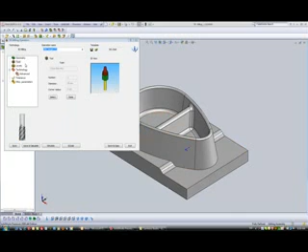I'll be using a 20 millimeter rough end mill to use on the rough cut. If I go to my technology area, we'll be doing a rough cut using a contour option in the rough cut itself. If there are any flats, which there are on this part, I'll be cleaning those flats after I finish my rough cuts, and I'll be leaving a surface offset of 1 millimeter.

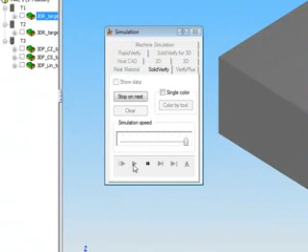Let's just take a quick look at our simulation itself using the Solid Verify simulation, and you'll note that the tool is working on every single one of those areas, doing a rough cut, stepping down the exact amount that it should be stepping down, cleaning the outside and the inside as well until it finishes the part, doing as much as it can do with this type of tool.

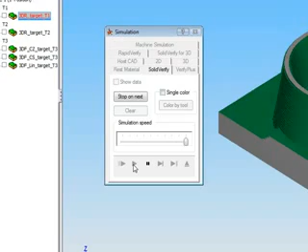Now, in my next operation, I'll be doing a rough cut again, but this time taking smaller steps to make it more feasible for a finished cut, but only working those areas that need to be cut.

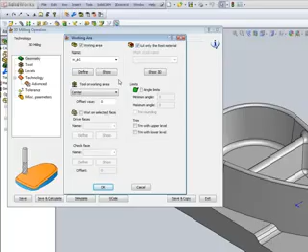So if I open up this operation we've done here, and go into my working area, I'll be using the same working area as last time, but I'll also add in one more note: cut only the rest material. This will allow the tool to work only in those areas that need to be cut, with rest material to be taken off. In my technology area, again I'll be using my rough cut and stepping down every 2 millimeters.

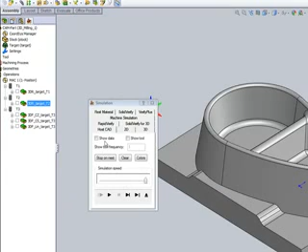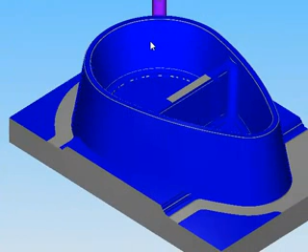Let's take a look at our simulation again using the Solid Verify simulation, and you'll note that the tool itself will only work in those areas with rest material to be taken off. It will not work on the outside of this area or in this blank area, just on the floor over there, on these walls, and on that floor over there.

Now it's more feasible to start doing the finish cut. In our next 3 operations, we'll be doing our finish cut.

In our first operation for our finish cut, we'll be doing what we call a constant Z, working only on the steep walls as shown in this area over here.

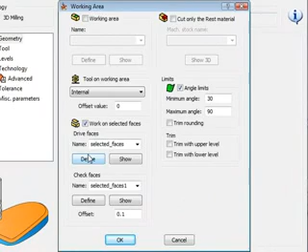So what we've done over here is we've gone into our working area and chosen the option of working on selected faces. If I were to show you those faces, you can see we've actually taken every single one of these faces, including these flatter areas over there.

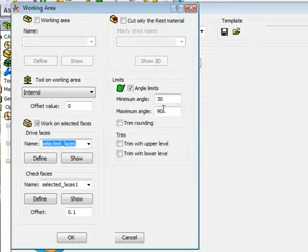However, we've also added a limit. The limit is to work only in the areas where the wall is steeper than 30 degrees, anywhere between 30 and 90 degrees, because we know that constant Z works best on steeper areas, so therefore it will not work on these areas over here, and also will not work on those radiuses as well.

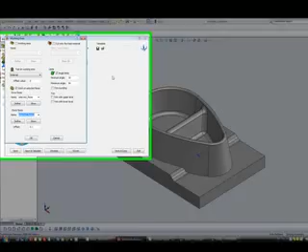Now, in our check faces, we actually have the floors themselves from the outside, and we're just going to make sure that we stay away from those floors by 0.1 millimeters as an offset to make sure we do not touch those floors itself.

Now, in our technology area, we'll be using the constant Z, going down with a scallop of 0.03 as a step down.

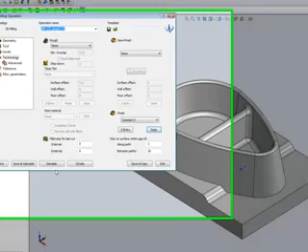And if we take a look at our simulation, you'll see that the tool will work only on the wall itself, as you can see with this toolpath over here, and will not work on this area, and will also not work on this area here as well.

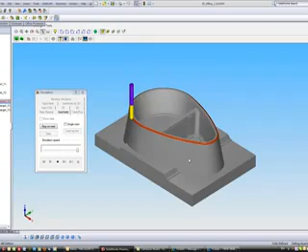If we take a look at our Solid Verify simulation again, you'll see the tool is working only on these areas as shown over here, and will also only work on this area over here.

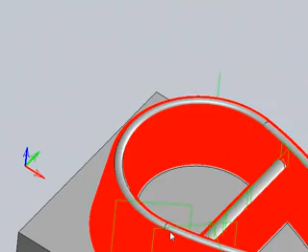And as we can also see here with our toolpath generator, you can see that the toolpath is only on these walls over here, inside walls, not on this top area, and not on this flat area inside here as well.

Now, in our next operation, we'll be using the same working area, but this time we'll be limiting it between 0 and 32 degrees. In other words, now I do want it to work on these floors and on these radiuses.

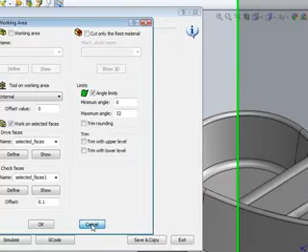The option that I will be using in my technology will be constant step over using pocket auto boundaries. In other words, the boundaries will automatically be taken from our working area, which is limited to these areas over here and to this floor.

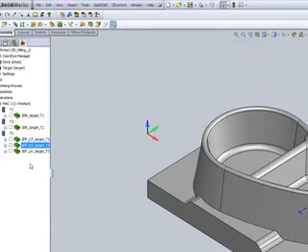And if we take a look at our toolpath generator over here, you'll see that it has been created on these floors over here, on these radiuses here on top, and this radius around the part itself.

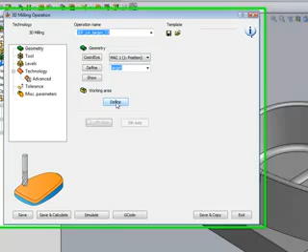Now, in my next operation, I'd like to do a finish cut of linear just on these outside floors over here. So if I go into my operation, again we're using the target, and in my working areas, I've switched my drive faces and my check faces.

Now my drive face is the floor over here, which was before the check faces, and my check faces is just the opposite—this area around here, also staying 0.1 millimeters away.

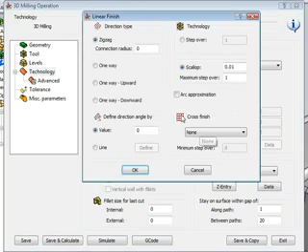In the technology area, we'll be using linear, and in my data area, we'll have a scallop of 0.01 to give a really nice, smooth finish on the part itself.

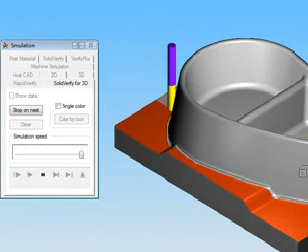If we take a look at our Solid Verify for 3D simulation, you'll note that the tool will work in a linear fashion only on that floor itself, staying away from these walls around here, leaving a nice smooth finish on the part itself.